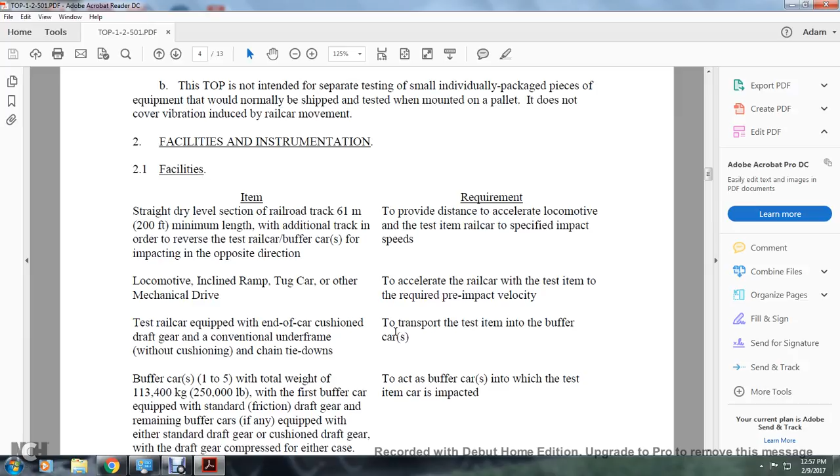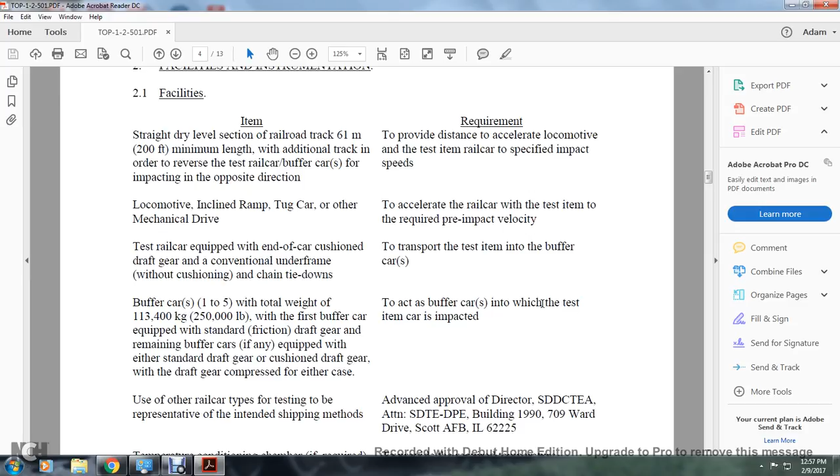Your buffer cars, 1 through 5, with a total weight of 250,000 pounds, with the first buffer car equipped with standard friction draft gear, and remaining buffer cars, if any, equipped with either standard draft gear or cushioned draft gear, with the draft gear compressed in either case. The requirement is to act as the buffer cars into which the test item is impacted.

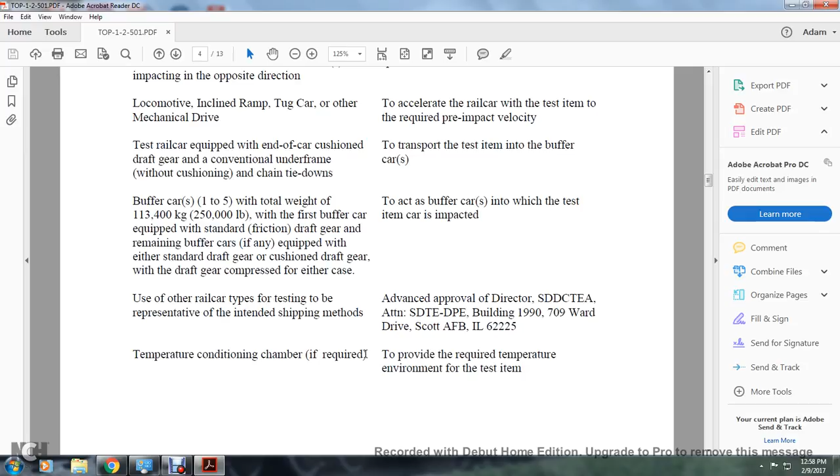Use other railway cars for testing representative intended shipping methods with advance approval of the Director, SDDCTEA, SDTE-DPE, Building 1990, 709 Ward Drive, Scott Air Force Base, Illinois 62225. Temperature conditioning chamber, if required, to provide the required temperature environment for the test item.

All right, your instrumentation devices for measuring. Rail impact speed timers, plus or minus 0.16 kilometers per hour, or plus or minus 1/10 of a mile per hour. Locomotive speedometer, 0.16 kilometers per hour, or plus or minus 1/10 of a mile per hour.

Coupler forces, strain gauge coupler if required, plus or minus 2.2 kilonewtons or 500 pounds of force. Tie-down bolt torque, torque wrench if required, plus or minus 5% of the reading. Acceleration, accelerometers if required, plus or minus 0.05 g.

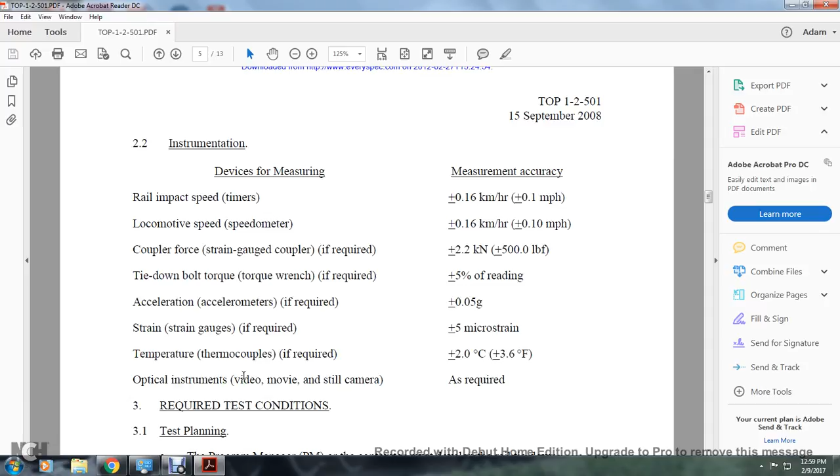Strain gauges if required, plus or minus 5 microstrains. Temperature thermocouples if required, plus or minus 2 degrees Celsius or 3.6 degrees Fahrenheit. Optional optical instrument, video, movie, or still camera as required.

Required testing conditions. 3.1 testing planning. The program manager or the contractor must develop the rail tie-down procedure for the item provided with the U.S. Military Surface Deployment and Distribution Command Transportation Engineering Agency for approval. The Surface Deployment and Distribution Command Transportation Engineering Agency is designated as the Land Mode Transportability Agent within the Department of Defense. Review the previous test report. Suitable tie-down procedures for similar test items are described in TEA pamphlet 55-19.

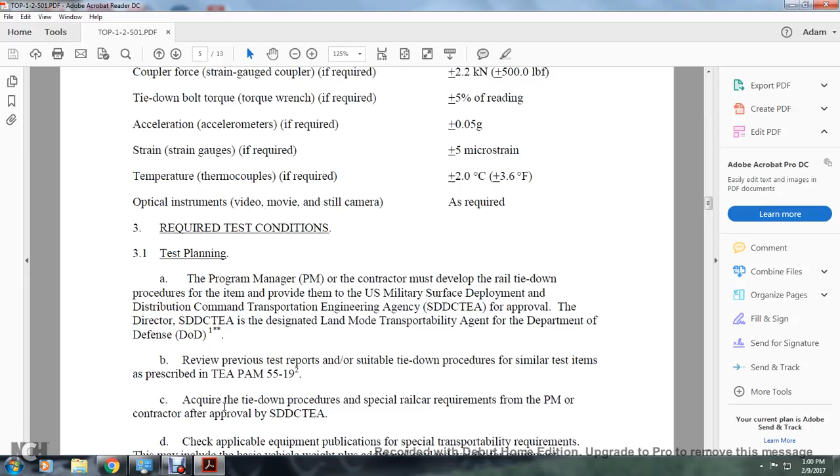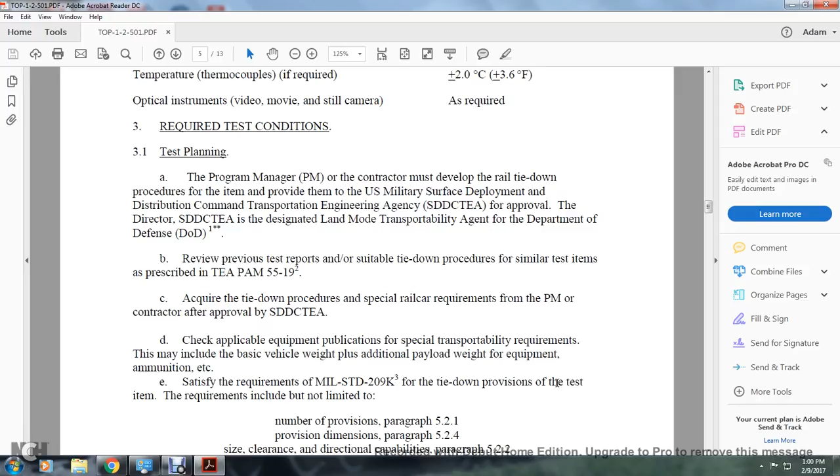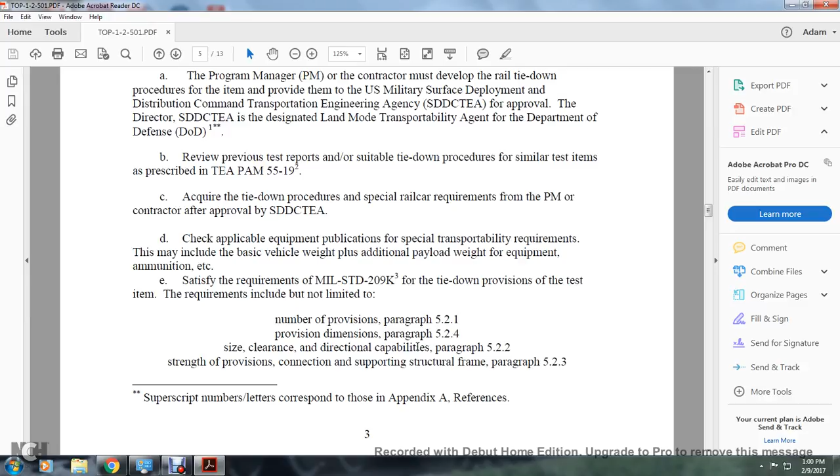Satisfy the requirements of Military Standard 209K with the tie-down provisions for the testing. These requirements will include, but are not limited to, number of provisions in paragraph 5.2.1 and provision dimensions in 5.2.4, surface size and clearance and direction capabilities in 5.2.2, and strength provisions of connecting supporting structural frame in paragraph 5.2.3.

All right, 3.2 testing preparation. Successfully complete the requirements of Military Standard 209K before the beginning of the rail impact test. Note and repair existing damage to the test item and railcar, including damage to the chain links and binders and other load securement devices. Personnel operating the locomotive and the ramp must be properly trained prior to the testing. Test all test items at maximum gross weight fully loaded, unless otherwise specified in transportation requirements.

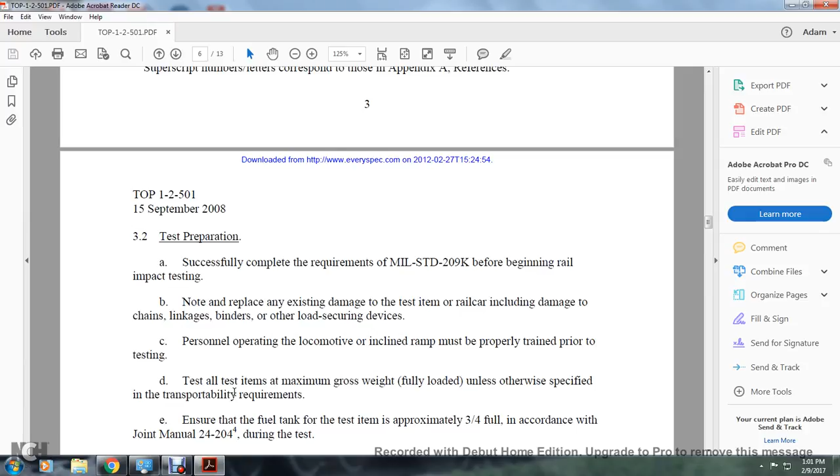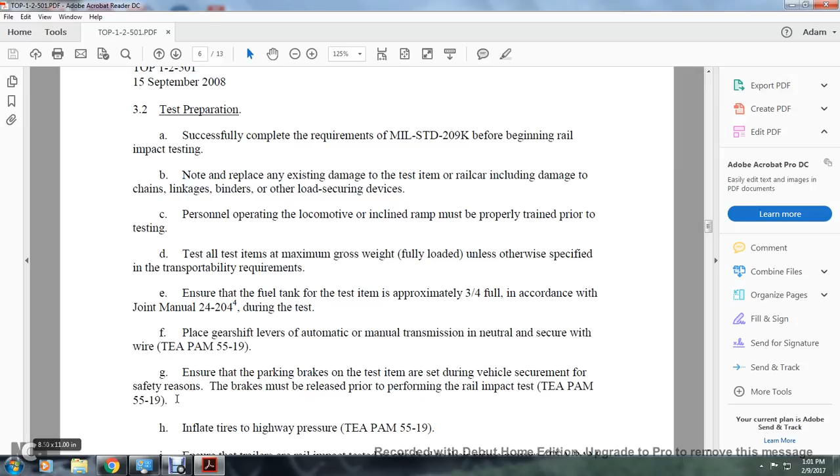Ensure the fuel tank for the test item is approximately 3/4 full in accordance with joint manual 24-204 during this test. Place the gear shift on the automatic or manual transmission in neutral, secured with wire, TEA pamphlet 55-19. Ensure the parking brakes on the test item are set during vehicle securement. For safety reasons, the brakes must be released prior to performing the rail impact test, TE pamphlet 55-19. Inflate the tires to highway pressure, TE pamphlet 55-19. Ensure trailers are rail impact tested attached to their prime mover, TE pamphlet 55-19, unless otherwise specified in the detailed test plan.

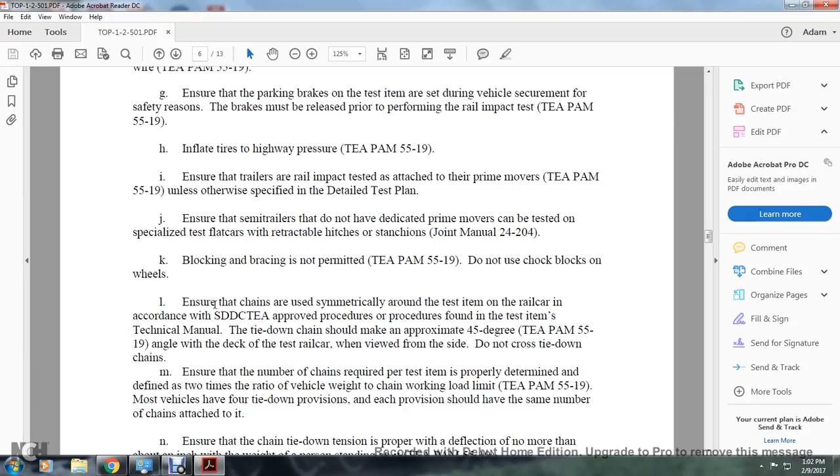Ensure semi-trailers that do not have dedicated prime movers are tested on specialized test flat cars with retractable hitches and stanchions, joint manual 24-204. Blocking and bracing is not permitted, TE pamphlet 55-19. Do not use chock blocks on the wheels. Ensure the chains are symmetrical around the test item toward the railcar corners per the Surface Deployment and Distribution Command Transportation Engineering Agency approved procedures, or the procedure found in the test item's technical manual.

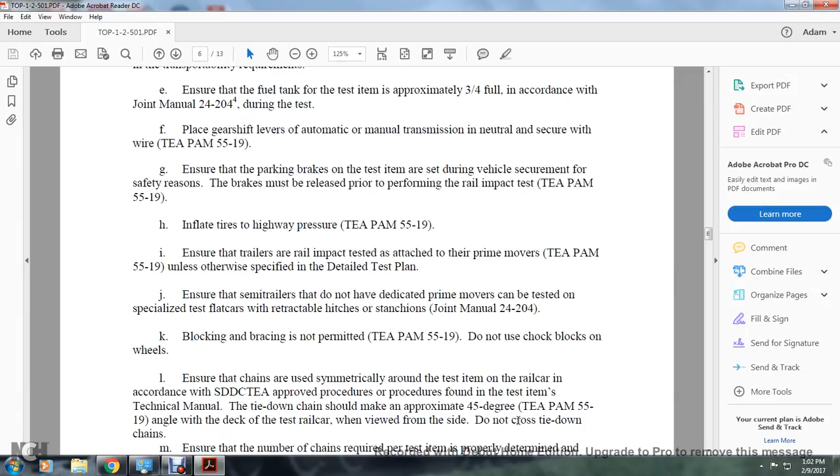The tie-down chain should be at approximately a 45 degree angle with the deck of the test railcar when viewed from the side, TE pamphlet 55-19. Do not cross the tie-down chains. Ensure the number of chains required per test item is properly determined by the ratio of the vehicle weight and the chain working load limit, TE PAM 55-19. Most vehicles have 4 tie-down provisions. Each provision should have the same number of chains attached to it. Ensure the chain tie-down tension is proper, with no deflection of more than about an inch under the weight of a person standing on it, TEA PAM 55-19.

Do not use wire rope for purposes other than restraining rotating parts of the test item, such as the turret, or other movable parts including outriggers and booms, without advance approval of the Surface Deployment and Distribution Command Transportation Engineering Agency. Torque the nuts of the wire rope clips to their correct value. Torque the cable clamps following the guidelines of TE pamphlet 55-19.

61 newton meters or 45 foot-pounds for 0.95 centimeter or 3/8 inch wire rope cable. 88 newton meters or 65 foot-pounds for 1.3 centimeter or 1/2 inch wire rope cable. 176 newton meters or 130 foot-pounds for 1.6 centimeter or 5/8 inch wire rope cable.

Dummy loads are permitted only when the actual equipment is not available at the time of test. The use of dummy loads must be approved by the Surface Deployment and Distribution Command Transportation Engineering Agency prior to the testing. Substitute dummy loads must be of equal weight, weight distribution and size, and have similar dynamic characteristics to the actual item replaced.

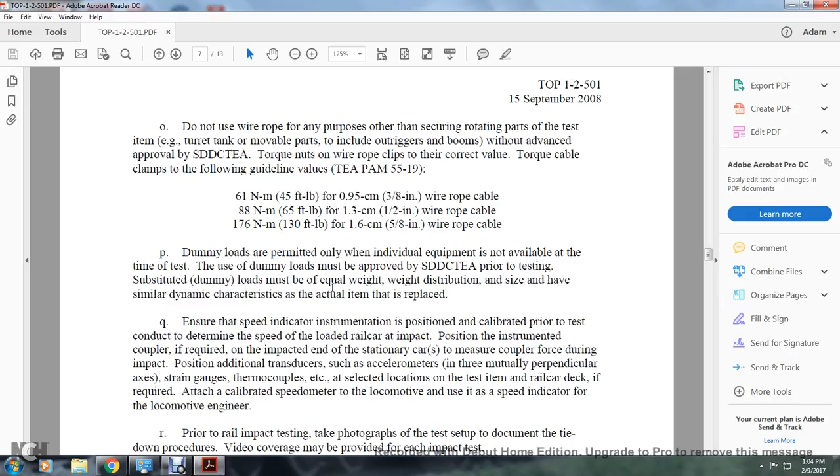Alright. Ensure the speed indicator instrument is positioned and calibrated prior to the testing, for determining the speed of the railcar at impact. Position the instrumented coupler at the impact end of the stationary car to measure coupler force during the impact. Position additional transducers, such as accelerometers in 3 mutually perpendicular axes, strain gauges, thermocouples, etc., at selected locations on the test railcar deck if required, and attach a calibrated speedometer to the locomotive for use by the locomotive engineer.

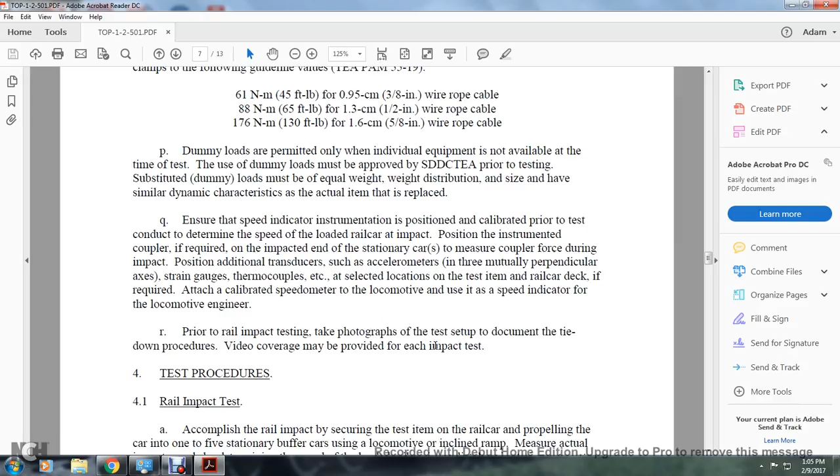Prior to the rail impact testing, take photographs of the test setup and document the tie-down procedures. Video coverage may be provided with each rail impact test. 4. Test procedures. Rail impact test.

Accomplish a rail impact test by securing the test item on the railway car, propelling the car into the stationary buffer cars using a locomotive or inclined ramp. Measure actual impact by determining the speed of the loaded railway car immediately prior to the impact at the point of impact, if feasible.

Prepare the stationary rail car with the coupler compressed, its air and hand brake set, and position the knuckles open on the buffer and test cars for coupling.

Subject the moving railway car to impact speeds of 6.4 and 9.7 kilometers an hour, or 4 and 6 miles an hour, plus or minus 0.8 kilometers an hour, or plus or minus half a mile per hour, and 12.9 kilometers an hour, 8 miles an hour, plus 0.8, minus 0 kilometers an hour, or 0.5 miles per hour. If the speed is below 12.9 kilometers or 8 miles an hour, repeat the impact.

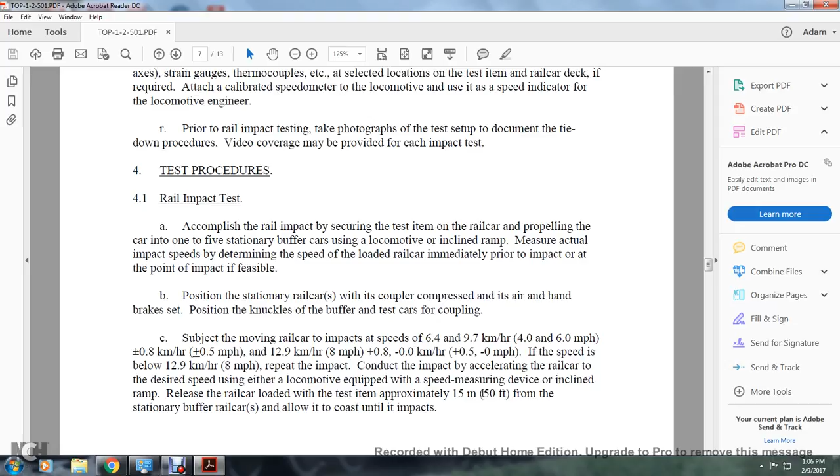Conduct the impact by accelerating the rail car to the desired speed using either a locomotive equipped with a speed measuring device or the inclined ramp. Release the rail car loaded with the test item approximately 15 meters or 50 feet from the stationary buffer cars and allow it to coast until it impacts.

Turn the rail car with the test item around, and subject the moving railway car to an impact at the speed of 12.9 kilometers or 8 miles an hour, plus or minus half a mile an hour. Impact the opposite end of the test railway car from the first 3 impacts of the total 4 impacts. If it's not possible to turn the test car around because of the track layout, ensure the final impact is accomplished in the reverse direction.

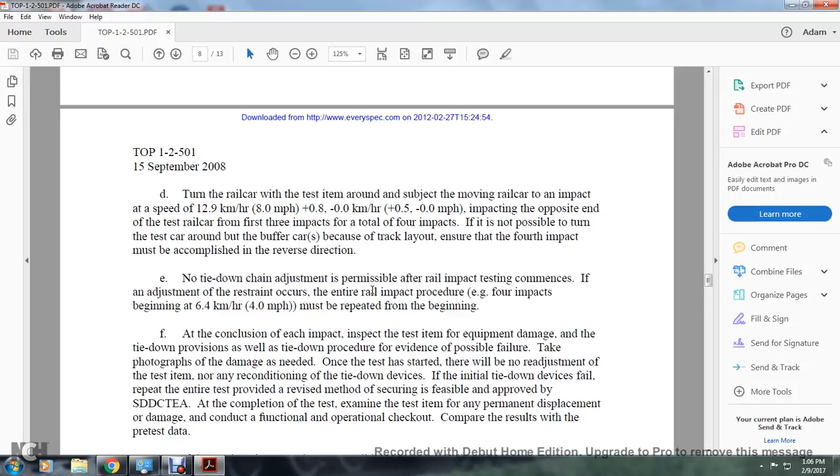No tie-down chain adjustment is permissible after the rail impact test begins. If adjustment of the restraint occurs during the entire rail impact procedure, the 4 impacts beginning with the 4 miles an hour impact must be repeated from the beginning.

At the conclusion of each impact, inspect the test equipment for damage to the tie-down provisions as well as the tie-down devices for evidence of failure. Take photographs as needed. Once the test has started, there shall be no readjustment of any tie-down device.

If initial tie-down devices fail, repeat the entire testing with a revised method of securing, with the approval of the Surface Deployment and Distribution Command Transportation Engineering Agency. At completion of the test, examine the test item for permanent displacement or damage and conduct a functional operational checkout. Compare the results with the pre-test data.

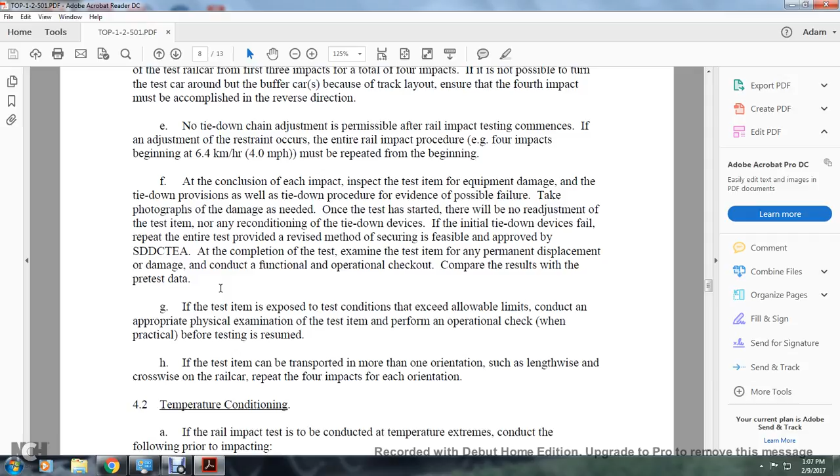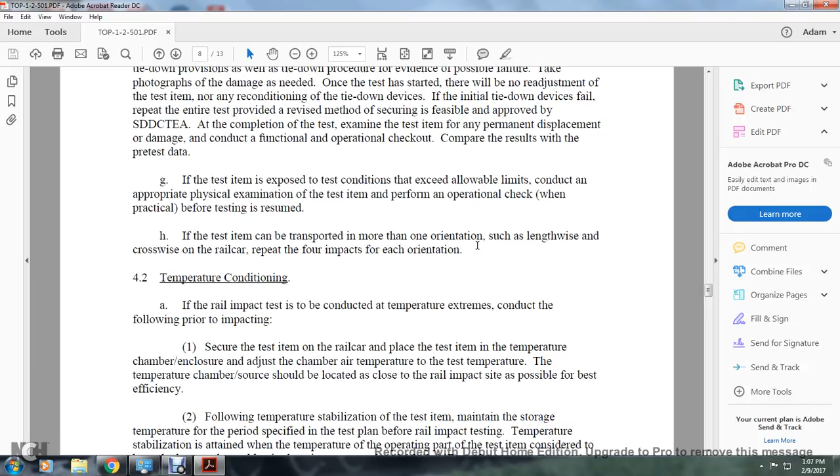G. If the test equipment is exposed to test conditions that exceed the allowable limits, conduct an appropriate physical examination of the test item and perform an operational check when practical before testing is resumed. If the test item can be transported in more than one orientation, such as lengthwise or crosswise on the rail car, repeat the 4 impacts for each orientation.

All right, 4.2, temperature conditioning. If the rail impact is to be conducted at temperature extremes, conduct the following prior to impact. Secure the test item on the rail car, place the test item in the temperature chamber enclosure, and adjust the chamber to the test temperature. The temperature chamber source should be located as close to the rail impact site as possible for the best efficiency.

Following temperature stabilization of the test item, maintain the storage temperature specified in the test plan before the rail impact. Temperature stabilization is attained when the temperature of the operating part of the test item considered to have the longest thermal lag changes no more than 2 degrees Celsius, 3.6 degrees Fahrenheit, per hour. Disconnect the temperature conditioning chamber source if employed. Perform the rail impact test as stated in paragraph 4.1.

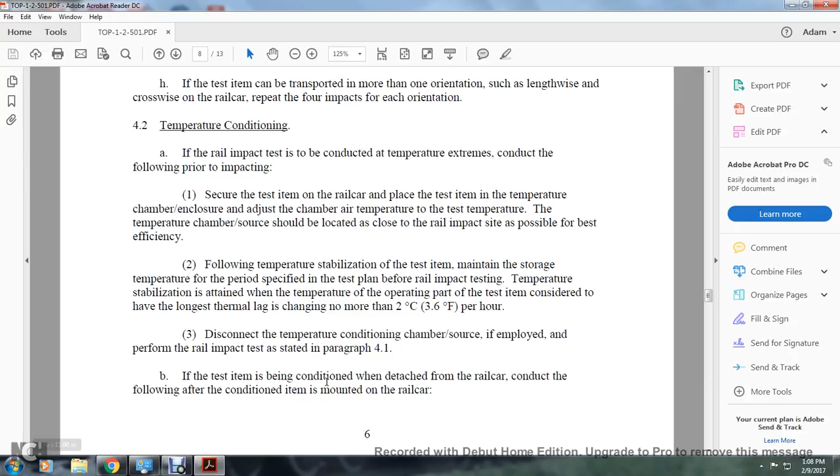If the test item is being conditioned detached from the rail car, do the following after the conditioned item is mounted on the rail car. 1. Place the test item in the temperature chamber, adjusting the chamber to the air temperature of the testing temperature. Following temperature stabilization of the test item, maintain the storage temperature for a minimum of twice the amount of time that the test item has been out of the temperature chamber. Perform the rail impact test as stated in paragraph 4.1.

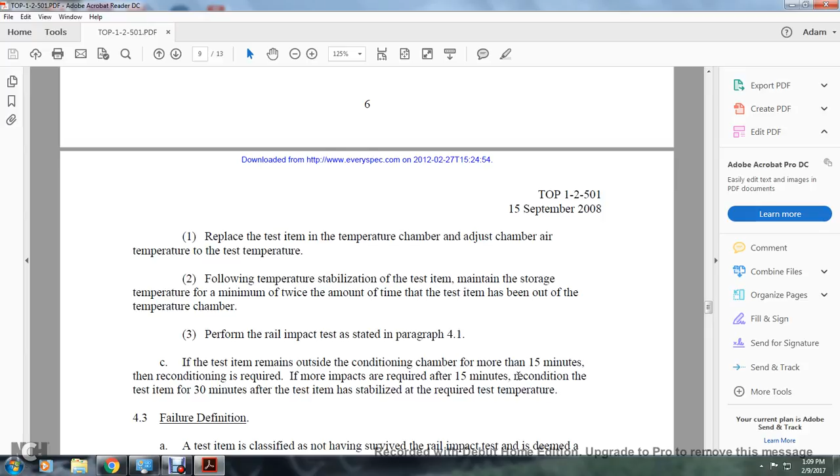4.3 Failure definition. The test item is classified as not having survived the rail impact test if any of its attached or integral parts break free, come loose, or show any sign of permanent deformation beyond the specified tolerances. The test item must be fully functional after the rail impact test; failure of the test item to operate as designed will result in test failure.

The breaking off of any tie-down chain will constitute a non-test of the restraint, and the test must be restarted at the 4 mile per hour impact.

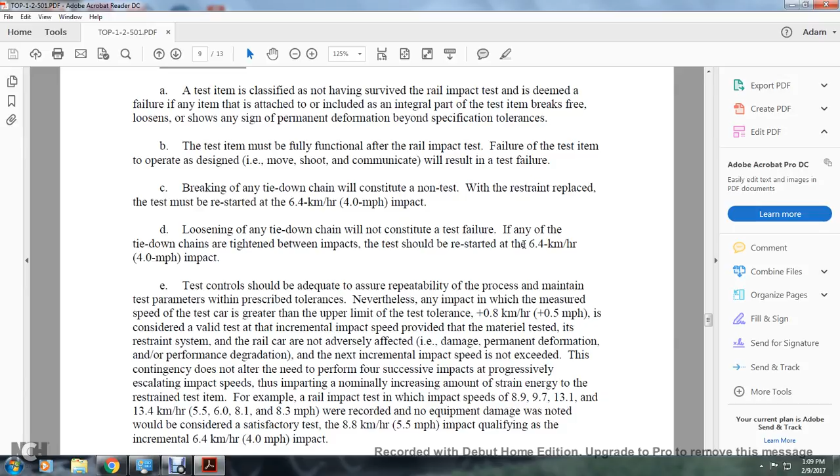The loosening of any tie-down chain will not constitute test failure. If any of the tie-down chains are tightened between impacts, the test should be restarted at the 4 mile per hour impact. Test controls should be adequate to ensure repeatability of the process and maintain test parameters as prescribed within tolerance.

Nevertheless, for any impact in which the measured speed of the test car is greater than the upper limit of tolerance of half a mile per hour, it is considered a valid incremental impact speed, provided the materiel tested and the restraint of the rail car are not adversely affected—adversely affected meaning damage, permanent deformation, or performance degradation—and the next incremental impact speed is not exceeded. This contingency does not alter the need for successive impacts.

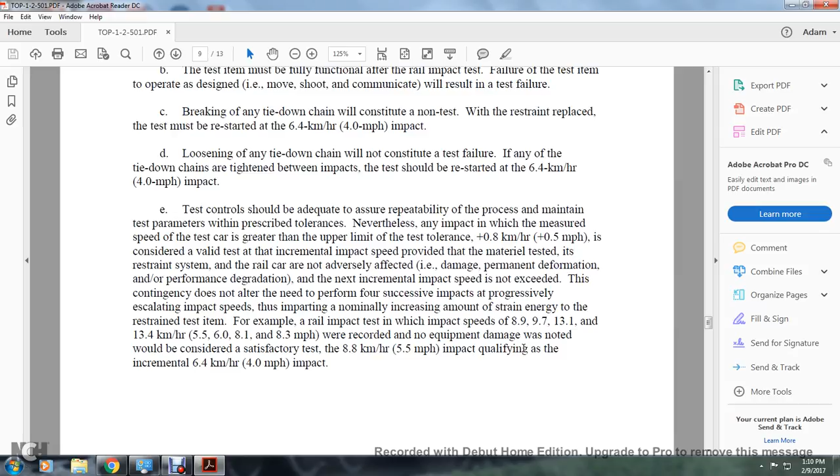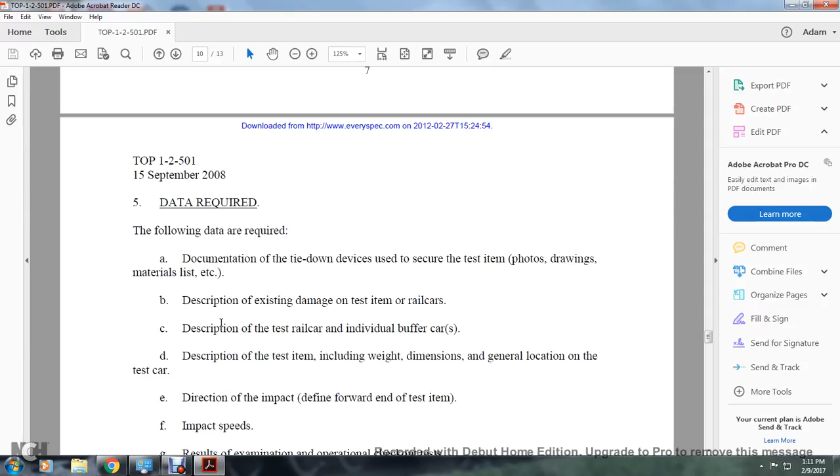Data required: documentation of the tie-down devices used to secure the test item, including photos, drawings, and material lists. Description of existing damage to the test item and the rail car. Description of the test rail car and individual buffer cars. Description of the test item including weight, dimensions, and general location on the test car. Direction of impact, defining the forward end of the test item.

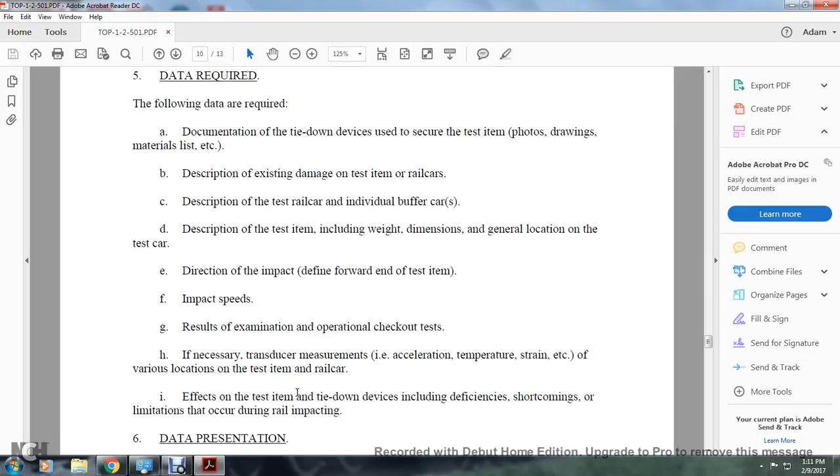Impact speeds, results of examinations and operational checkouts. If necessary, transducer measurements including acceleration, temperature, and strain at various locations on the test item and railway car. The effects on the test item and tie-down devices, including any deficiencies, shortcomings, or limitations that occur during the rail impact.

Data presentation: prepare photographs and sketches of the tie-down configuration. Prepare graphs of peak coupler forces versus actual impact speed if required. Prepare photographs of instrumentation and any component damage if required, with compile tables of peak acceleration levels, and plots of time versus acceleration for each impact.

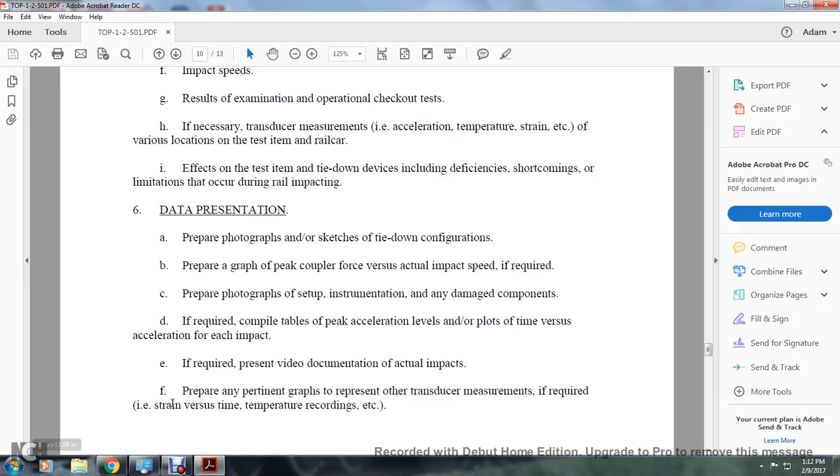If required, present video documentation of actual impacts. Prepare additional graphs to represent other transducer measurements if required, such as strain versus time and temperature recordings.

Forward comments, recommendations, or changes to any pertinent data, or suggestions for improving this publication, to the following address: Test Management Business Division, U.S. Army Developmental Test Command, Aberdeen Proving Ground, Maryland, 21005-5055. Technical information may be obtained by contacting the preparing or supporting activity: Equipment Division, U.S. Army Aberdeen Test Center, with 400 Colleran Road, Aberdeen Proving Ground, Maryland, 21005-5059.